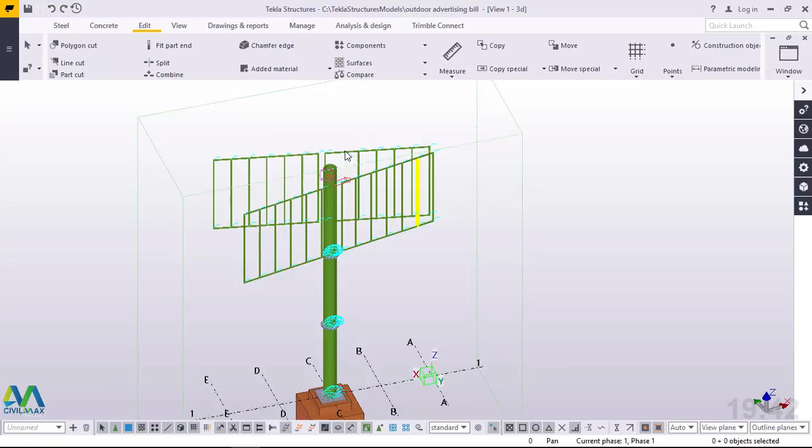I'll zoom closer. From here we have 4 panels, and we need another 4 to make them 8. The reason I separated them into 4 parts is for ease of erection or installation. Once all the parts have been fabricated, installing a whole 12 meters by 10 meters is hectic, so I decided to split them into 4 compartments or 4 steel frameworks.

But when erecting or replacing canvas for advertisement, it will take the whole span of 12 meters by 10 meters. You will not be able to advertise on one steel frame compartment and not the other. It won't be possible, because if you rent the whole 12 by 10 face of one side of the steel board, but if the advertiser is capable of paying for both sides, it's upon him.

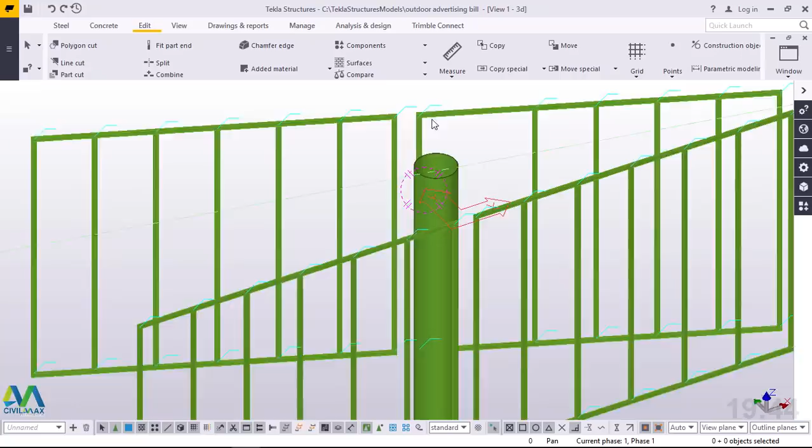Now let's get started here. The key is on how to reinforce this steel frame to the main column. That is the key part we are going to do today, how to reinforce this steel frame to the main or primary column. Now we'll go straight and get started.

If you take a look at this steel frame, we have so many steel members here. Center to center we placed a meter, but we can do with 2 meters, which is also okay.

Now what we'll do is get rid of some steel here. We'll press Control and delete all this. We'll delete that one, select this, right click and delete, then select this, right click and delete. Do the same thing on this side, click that, right click and delete, click on this, right click and delete.

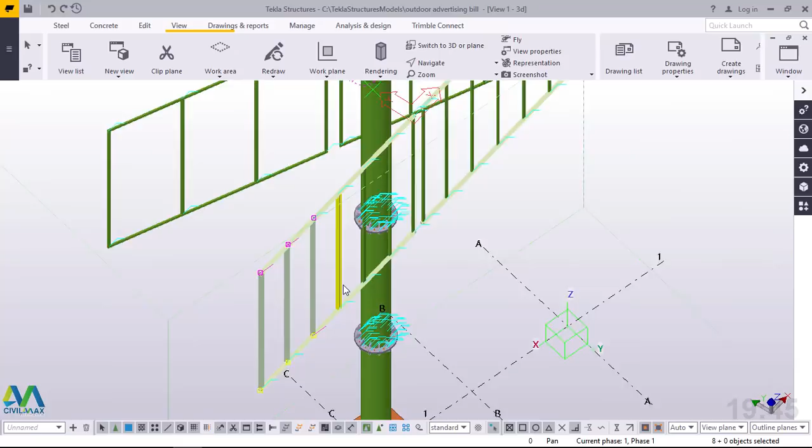On this side we will not bother a lot with it, because once we've done everything on this side, we'll just invoke a mirror command and everything will be mirrored on this side. So what we'll do is delete this end so we don't repeat whatever we've done several times.

Now let me just delete all this. To delete, just select with the left button on the mouse, then right click to bring up all these options where you can pick or invoke whichever command you want, either copy, move, or delete. We want to delete all those. Let me pick these by pressing Control just to be a little bit faster, then right click and come to delete.

We remove that. Now if I switch back to my grid 1 or elevation 1, I'll be able to see how this is presenting itself.

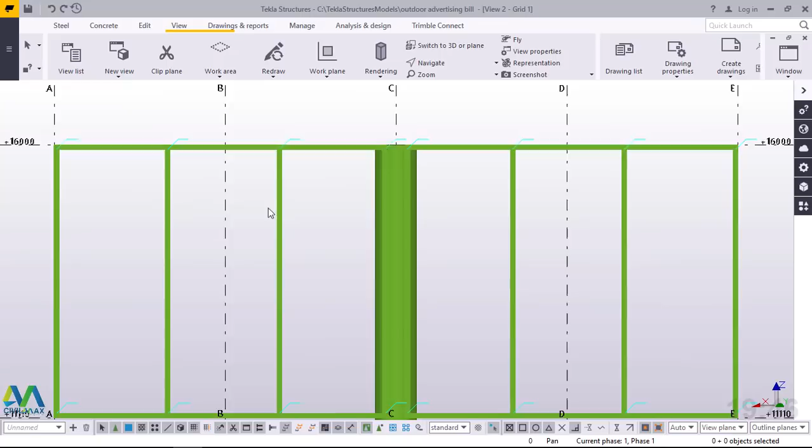Now from here we want to copy this whole compartment or framework to the level of 6 meters. Remember, this is a requirement that any billboard must have a 6 meter ground clearance. So we have provided that from 0 level to 6 meters. This is where the next advertising frame will end, at 6 meters, then it goes all the way to 16 meters.

Let me just counter check with you here. From here, if I click here and click there, up to here is 10 meters. Then from this end to this end is 12 meters. So instead of making one whole frame of 12 meters by 10 meters, which is easy to weld, it will give you an unresolvable problem while installing this panel at this height.

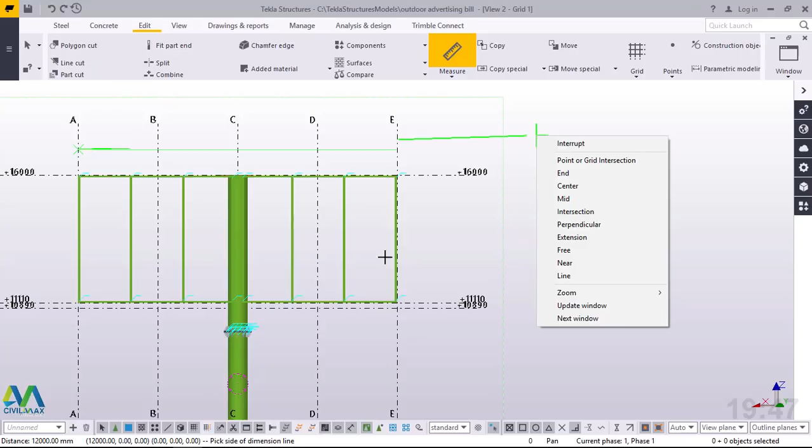Now the easiest way is to split it into 4 compartments, this framework and this one, so you will be able to mount them and bolt them easily, and installation will be fast and not hectic.

Now let's switch back to isometric view, and remember the key is how to reinforce this. We'll start here right away. We'll come to steel beam, we'll come to steel, and I'll snap on that spot at this end, and run all the way to the bottom end.

We want to use an L profile to provide an option where we can bolt this to a reinforced section, where we can bolt this to this primary column.

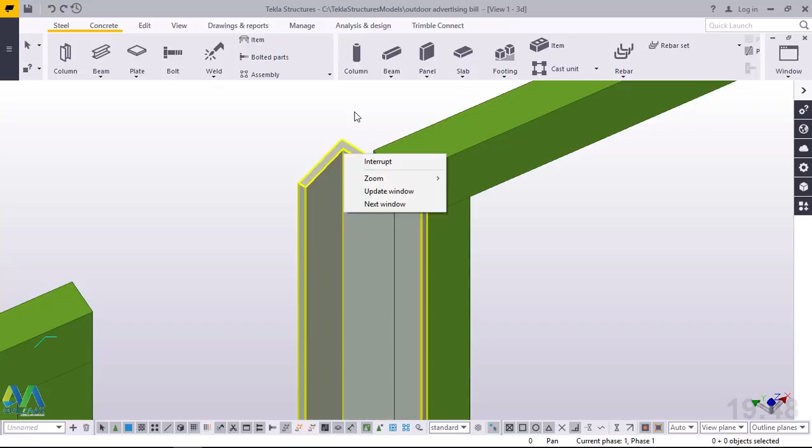This is not placing itself properly because our XYZ axis isn't properly placed. I'll click on it, right click, and come to delete to remove it. I'll come to view here, then reorient my XYZ axis. I'll click on the work plane tool and click on this. I want to place my axis right there.

Then I'll go back to steel here. I'll pick steel beam and pick beam there. Then pick on the point where I want to start placing my beam, the starting point, and I want it to end right at the bottom here. We will weld this angled profile against this framework.

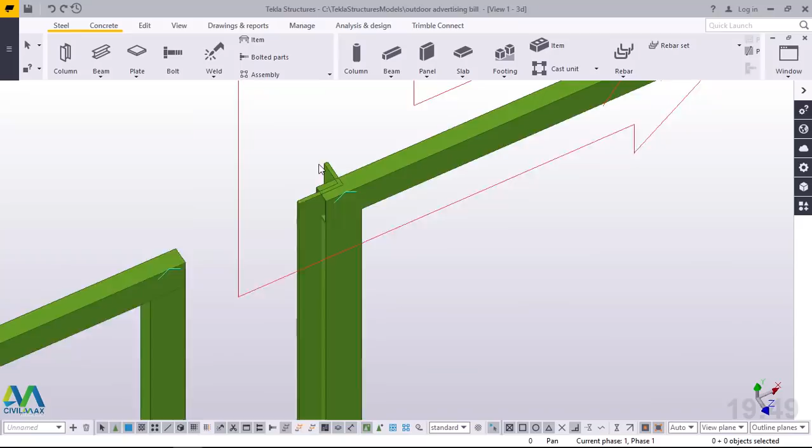We'll place it there, right there, then zoom out, come right here. Then once you've done that, we'll just click on it, then right click and come to move, pick on that corner, then place it here.

Remember, this will be welded to this member. Then what we are going to do, we want to do the same thing on this end. Now what we can do, just right click and come to copy special, then come to mirror.

We want to mirror this, but it won't mirror properly unless we reorient our XYZ axis. We'll come to view, work plane tool, then we place our XYZ plane right there. Then we come to, right click and come to special copy, then come to mirror.

Then we want to use an edge of this member as our mirror line from that spot and this spot, and snap there. The moment you see the angle is changing here to 180, just go ahead and click copy, right click and go to OK by giving it an OK.

Right click by selecting it, then pick move. We want to pick it from here, from that corner, and move it all the way to this end. We'll snap on that spot, right click and give it an OK.

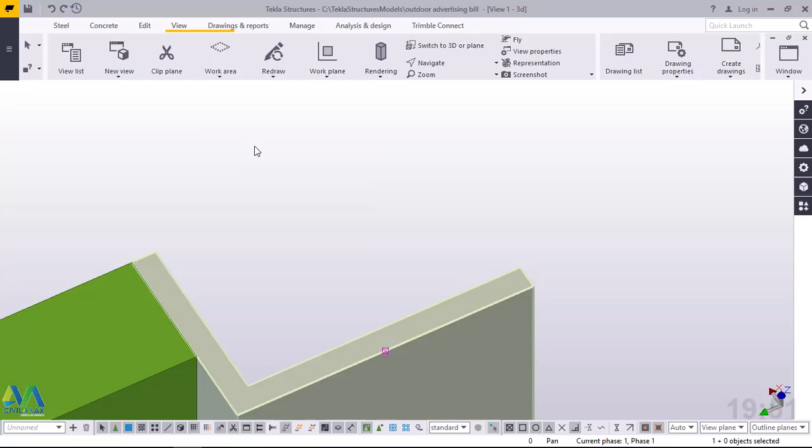Now we want to weld this to this. We'll come to applications and component here, just click here on applications and component. This dialog box will come up, and in this space just type weld.

A weld macro will be provided to you, a stanchion weld, numerically named 85. You can pick that, then we'll weld this to this. That will weld it to that. Let's wait and see. That has been welded but not welded properly.

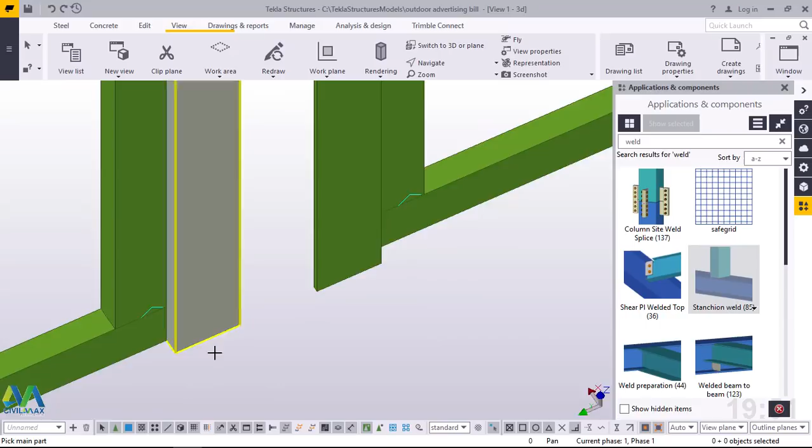Now we weld that to that, or you can weld this to this. Perfect. Let's check down there whether everything is right. Then we'll do the same thing here. We'll weld this to this. Perfect.

Now this has been welded to this, and this will be mounted onto a support from this main column, and will be bolted to these two compartments or framework. Now click on empty screen, right click and come to redraw to remove all those remains of weld or symbol, and active, to remove that active symbol of a macro.

Now if you turn this, you'll be able to see this has been welded to that compartment.

Now what we want to do, we want to copy everything, but before we do that, we want to place a steel member that will be running from the midpoint to that end. Let's do that by first locating the midpoint of this steel member, and let's check it first.

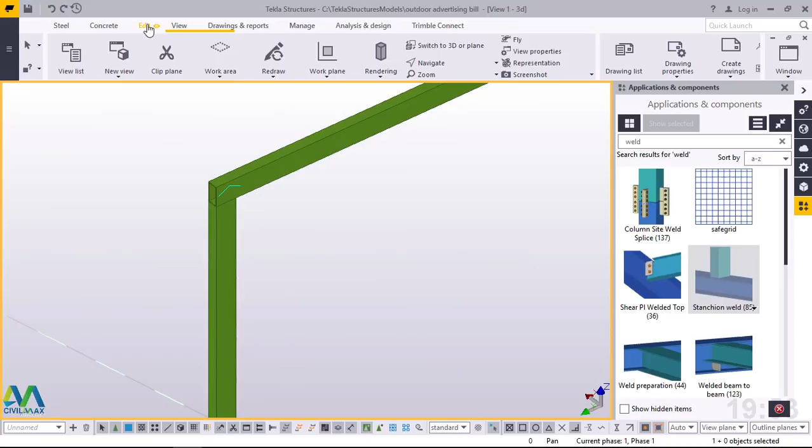Prior to doing that, we'll come to edit and come to points, and pick mid. We'll come to view. We want to rotate it to a point where we can be able to see all the points we intend to place our points.

I'll close that. I'll come to points again here. Pick that and snap on that spot, and I'll run all the way to this spot. I'll press Ctrl 2 and be able to locate this spot here.

Right there. The reason why I'm doing that, I want to locate the midpoint for this member. And to go back, remember you press Ctrl 4, will take you back to a solid 3D representation, not a transparent one.

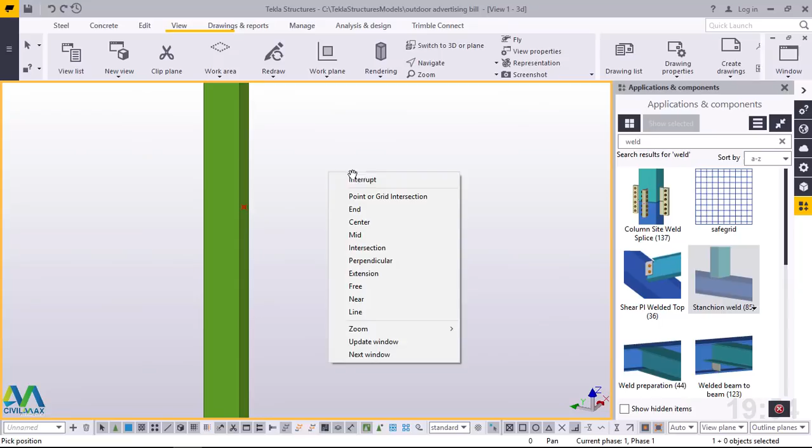Now to do this, I'll come to that. I'll pick the point, then right click, come to copy. I want to copy this point from this end. I want to copy it from this point. I want to copy it from this location, any point from that spot, and take it all the way to this end.

Take it all the way to that end. If you turn this closely or keenly, you'll be able to see that we've transferred that point to this end. Now it's very simple.

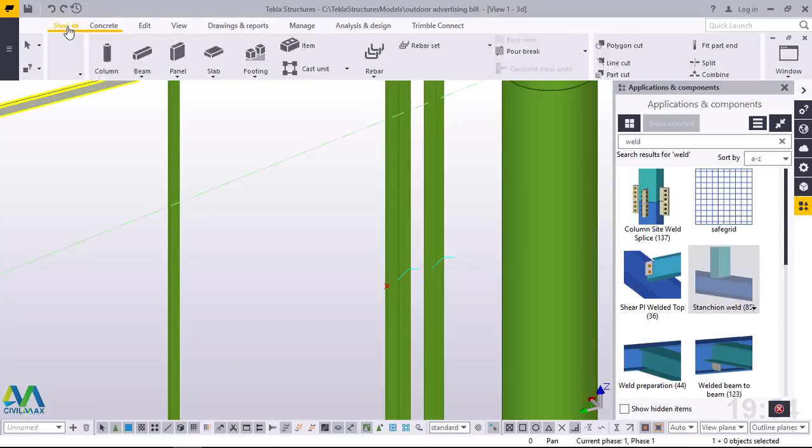Now come to the steel beam here, and just snap on this spot right there, zoom out and run all the way to this end. Snap it here, right there.

Now we want to change the size and profile of this steel member. We change it to RHS, rectangular hollow section. First, I want to rotate this, press Ctrl R, then pick a point where you want to rotate this member about.

Now I want to change the profile of this member. I'll double click, then the beam properties will come up because this is under beam. Then I'll come under general and click on that button under profile.

The catalog. Under this steel catalog provided to us, we'll work with the RHS, hollow section. I'll minimize that, then come to rectangular hollow section. I'll click on that plus sign to give a breakdown of various RHS profiles. Now I'll pick this.

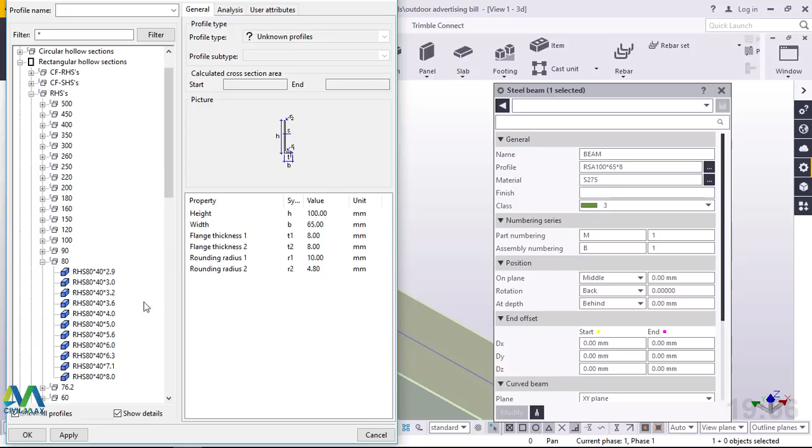I want to work with 80 by 40 by 3 millimeter thick. I'll pick on that, then apply and accept that. Once you give it an OK, come here under beam properties, then click modify. Remember, we are using Tekla Structures 2018, the latest version.

Now positioning, it is the right position, but the orientation is wrong. We'll come to position here and go to rotation. Under rotation, we'll play around with this until we get its appropriate position. We'll click either back, already there, or below, then try clicking apply.

But it has placed itself off the center. We want the center of this member to match the center where we placed the main, the center of this member.

I'll come back again, and under rotation, I'll click top and click modify. It hasn't moved properly. I'll click top again and click, it has not responded. I'll click below and click that, it has not responded. What we'll do again, click front and click that. It went back where it was before. So these are the options you play around with until it gets into the right position.

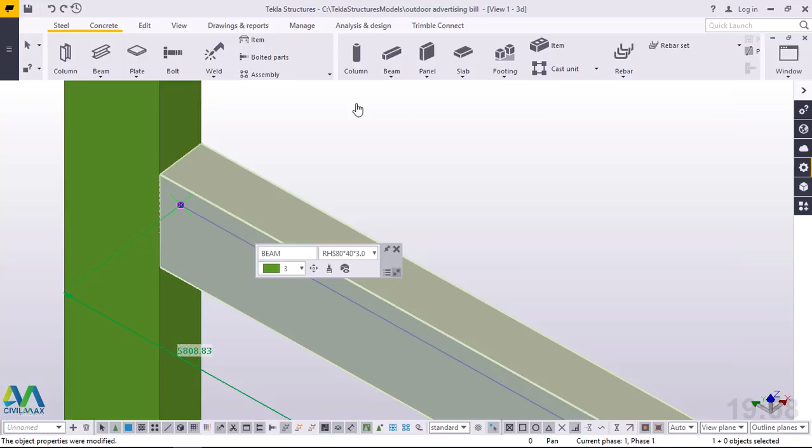Now after doing that, we'll switch back to Control R and pick a position where we intend to rotate this model about. Then zoom out, check whether what we've done is right. Perfect.

Now the same thing will be done to this framework at this end, and to do that is simple. Just right click and come to copy. Under copy, we want to pick this appropriately, from this spot, and run all the way to this end.

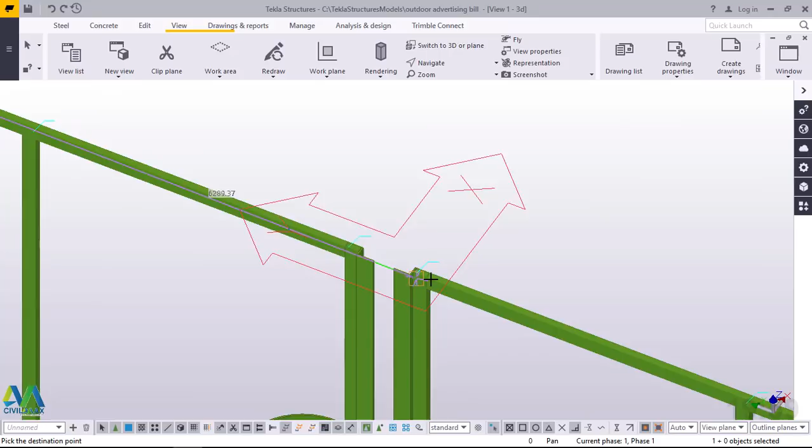We must be very accurate with this. Perfect, that has been copied. Now the next is welding.

We want to weld this to this. Let's try that if it will work for us. Then we want to weld that to that. Then again we want to weld this to this. We come to navigate and rotate with mouse, then rotate about that spot so we can see this spot, and we want to weld this to this.

Perfect. Right click and redraw to remove all those remains of active commands for the macros we've used for welding. Now this is what we have for now, and remember we'll place some bracings here later on after we've reinforced our billboard properly. I'll close this.

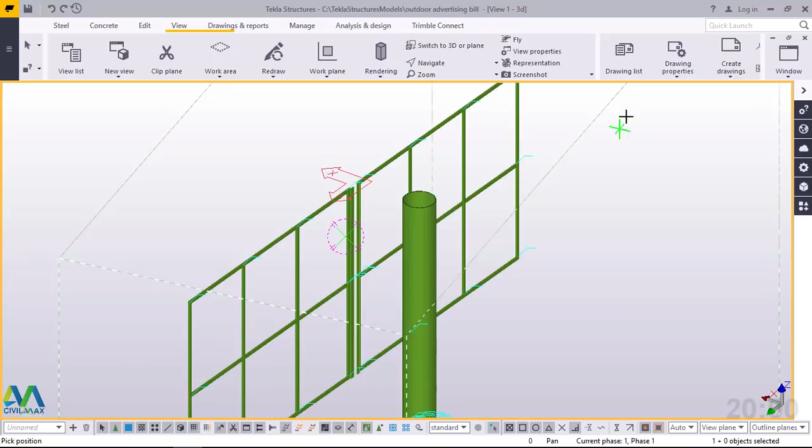Once I've closed that, I'll select everything here, as simple as that. Press Control and pick on that, pick on that, pick on this. I'll switch back to my plan at 16 meters, I'll go there later on. I'll switch back to grid 1 or elevation 1.

I'll pick on that. Now our main aim is to copy this member to this height of 6 meters, which is the ground clearance.

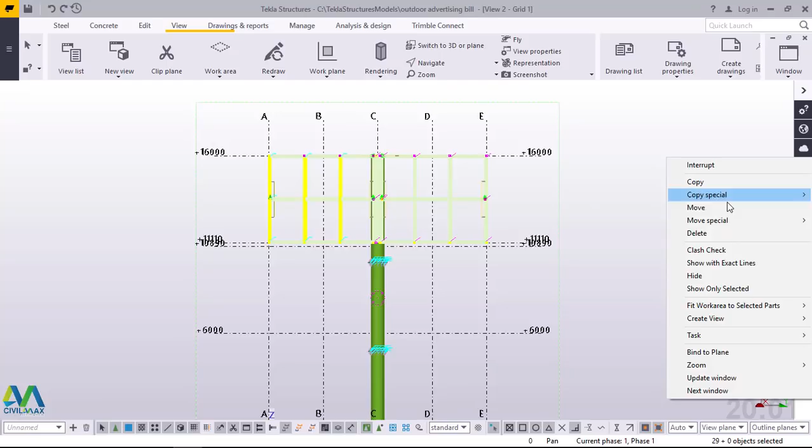I'll right click and come to copy here, then pick it at a position that will be very accurate for us. I'll snap on that spot, then zoom out and locate a point here for level 6, for 6 meters above the ground level. Then having done that, I'll press Control again and select everything here.

Pick on that, pick on that, pick on that, pick on that.

I'll switch to isometric view. I'm not able to see the other parts. I'll pick on that, I'll pick on this, I'll just select that. So once everything has been selected, make sure you don't copy the grid. Grid should not be copied.

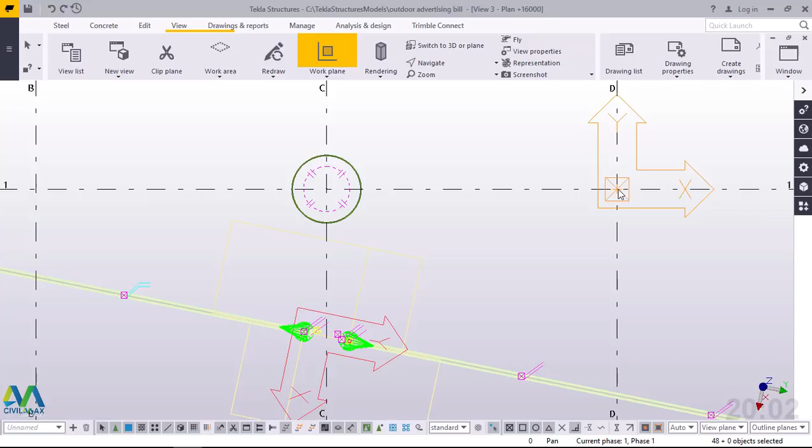Now we'll switch back to this height of 16 meters. We want to mirror this, and prior to doing that, make sure your XYZ axis is in appropriate position. We'll come to view, and over here we come to our work plane tool. Then we'll shift and place our work plane tool down here. Click there, right click and interrupt just to exit from that work plane tool command.

Then still this selection is still active. We'll right click and come to special copy. Under special copy, we'll come to mirror. Then we'll pick this point and this point as our mirror line. Then snap right there, then invoke a copy command.

Right there, let's wait for the result. It has been done. Click expand, then come here and click OK. Then switch back to isometric view for you to see what you've done, whether it is accurate or needs some slight rework. It's perfect. Click, right click and redraw to remove those remains of the copy command.

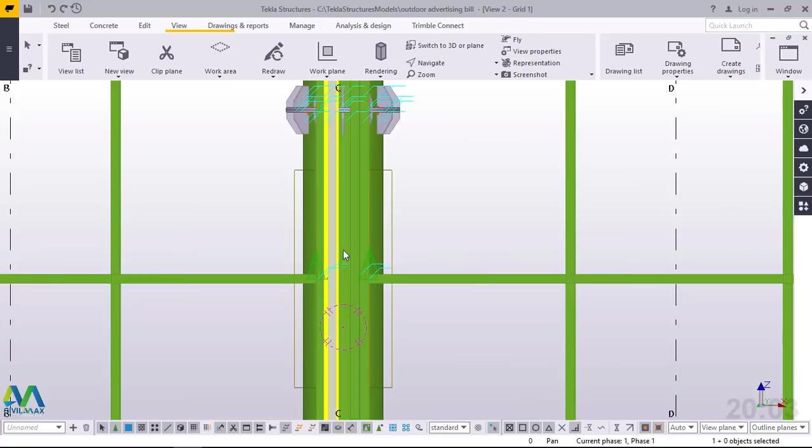Now this is what we have now. If you switch back to elevation 1 or grid 1, this is what you'll be able to see. Let's refresh again, let's redraw. This is what you'll be able to see from 0 level to 6 meter high.

This is the ground clearance. That is the standard required for a billboard to be off the ground, 6 meters.

Now this reinforcement we will place later on. Let's still work on the reinforcement of the steel frame. Let's switch back to isometric view, and we want to place our cap plate.

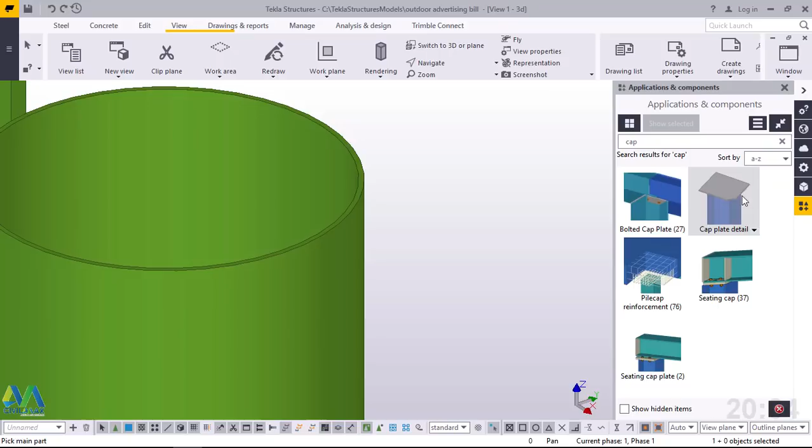To place that, we'll just come under applications and components, this button here, and we'll just press cap. Then this cap plate, cap plate detail macro, will come. Then the moment you invoke that command, select the column you want to place the cap plate on, pick on it, then pick on the position you want to place it on, the center. It will appear on that spot.

There it is. Now we'll close this. We'll double click on that cap plate, because we don't want a square cap plate. We need a circular cap plate because our column is cylindrical. We'll close this. I'll zoom out and place this in a position where I'll be able to see clearly.

Now from under this cap plate detail dialog box, I'll come under picture and go straight to that drop down arrow. I'll be presented with 3 options. Do I need the rectangular or circular? I mean, there are 2 options: rectangular square, and circular. I'll pick circular because my column is circular or cylindrical.

I'll come here and click modify, and prior to doing that, I want to change the thickness of my plate. I want 16 millimeter, that's all. I don't need this dimension because a circular measurement is just one, either radius or diameter. I'll pick that, click modify, and click OK.

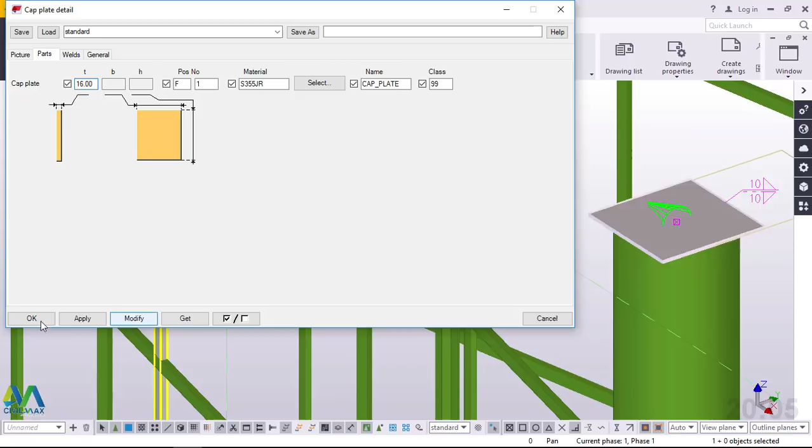Right click and interrupt just to exit from that command. And we want to remove this symbol. Remember, this green symbol means the connection is perfect, and shows the macro is active. To remove that sign of active command or active macro, just left click on empty screen, then right click, then come to redraw. You will refresh your screen, and those signs will disappear.

Then we'll rotate this by going to navigate and pick and rotate with mouse, then press your left button on the mouse, and you'll be able to rotate this comfortably. We've done that. Let's switch back to a plan of 16 meter high. We'll refresh this. Again, we will refresh that.

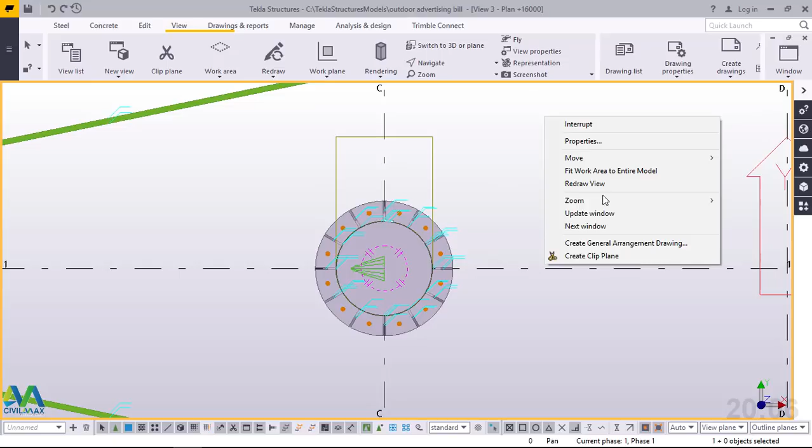We want to start reinforcing our steel, our steel frame. And remember, also in the midpoint here, we want to place an angled profile. Now what we'll do prior to placing this reinforcement or supporting members to our canvas steel framework, we'll switch back to isometric again.

We'll switch back to our isometric. Then we'll reorient our XYZ axis. We'll place it here, we'll place it here, somewhere here. Place it there. We'll place it there.

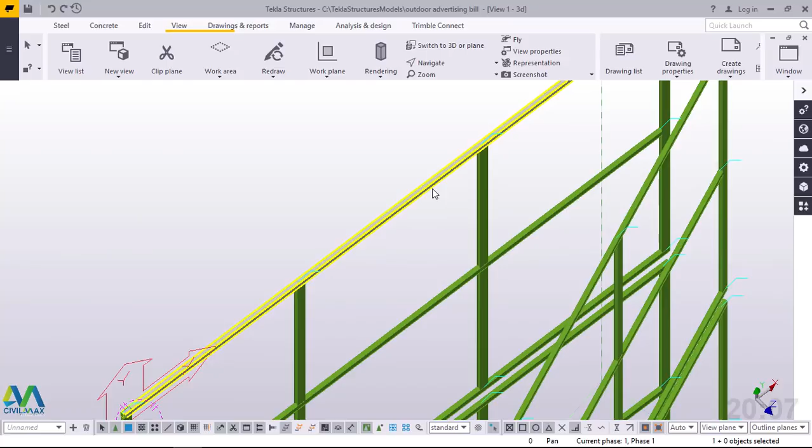From there, we want to place this at the midpoint of this framework. It is simple. We'll come to midpoint here, pick online, then we want to locate a midpoint from this end, that end, to this end, right there, and close that. Our midpoint is there.

And what we'll do, we'll just copy one of these. We will not copy that. We'll come straight to steel here and come to steel beam and pick on that. We will copy because we don't want to have a repetition of what we've done several times. We'll pick on this, we'll pick on that. Then come and copy it here.

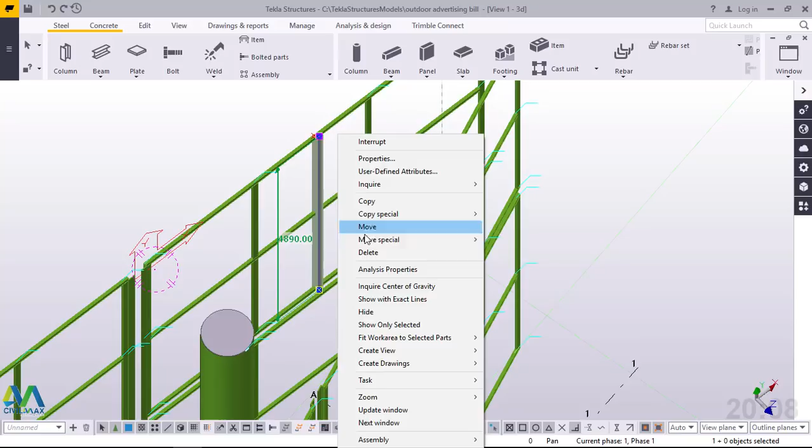Come and copy it there. We'll right click. It hasn't gone deep because it has a welding that is clashing with some of our steel profile. We'll come here, right click, come there and check. We want to check this measurement, interrupt that.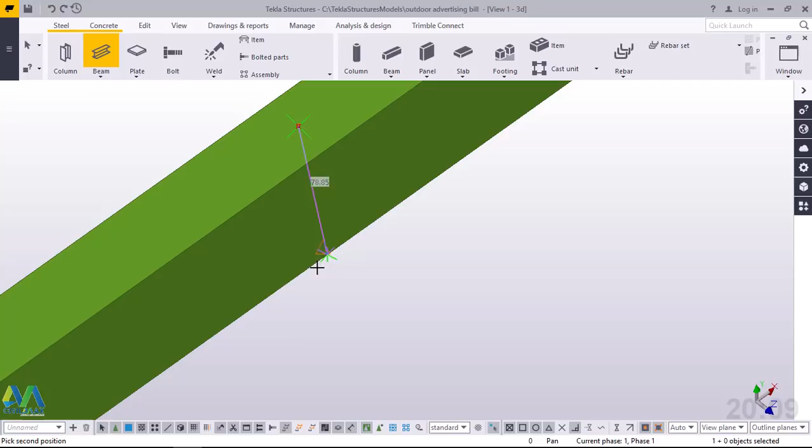We want to check on this measurement. Let's click on that. You'll be able to see this is 4890. We'll come to steel beam right there and snap right here and locate it down here and type 4890 and enter on the keyboard.

That is not right, the position is not right. We'll undo that, click on that and delete. We'll come to edit, come to edit points. We'll come to any position and snap on that spot, and snap on this spot, then snap down here. Try rotate this to see whether your points are located in appropriate position.

This is accurate and we can just place that member right there. We'll come to steel beam, from that spot to this spot, 4890. Then enter on the keyboard. Then we'll change this member to an L profile.

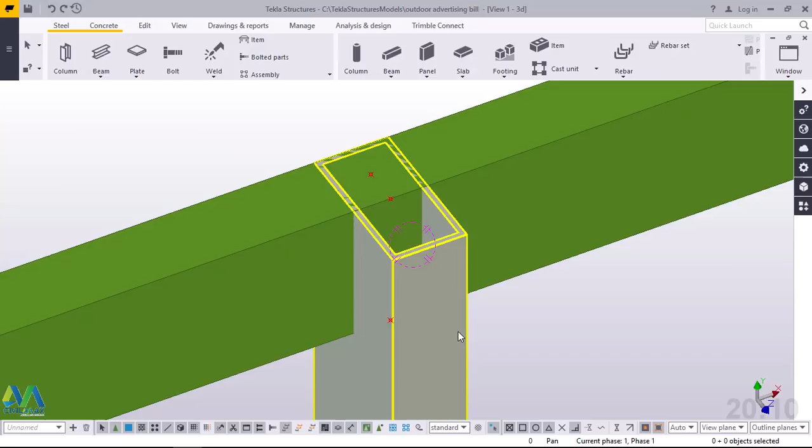Under beam properties, after double clicking on this member, click on that button under beam properties. You will be presented with a steel catalog where you will be able to select the appropriate steel profile and size. Now we'll come to L profile or L profiles.

Under L profiles, we'll come to RSA. RSA will go to 100 by 65 by 8 millimeter thick. I'll go ahead and apply and give it an OK. After doing that, come here and modify under beam properties, just like that. Now here we'll play around with it by rotating it to a position where we will be able to link it with the main supporting member.

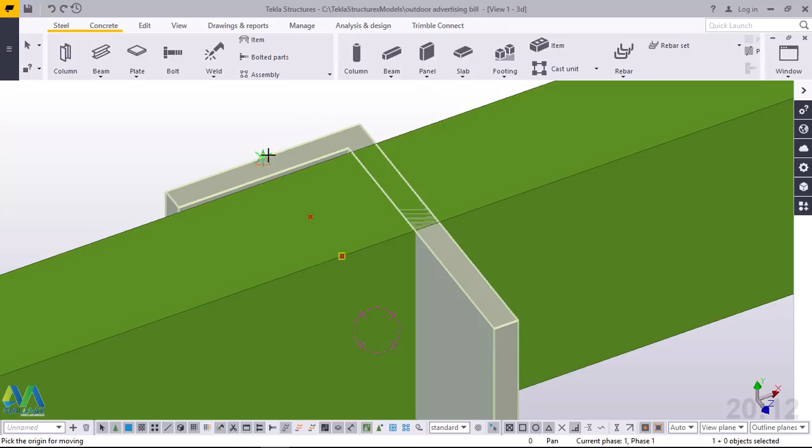Here we want to weld it against this member, running all the way to the bottom end. It is simple: what we'll do, we'll right click and come to move, pick it from this spot and bring it here. Perfect.

Or from here we can just double click on it and reorient it under rotation. Here we'll come to rotation and click back and change that. It won't be the best way to present that. Just click undo, we want that to be welded on that spot. Perfect.

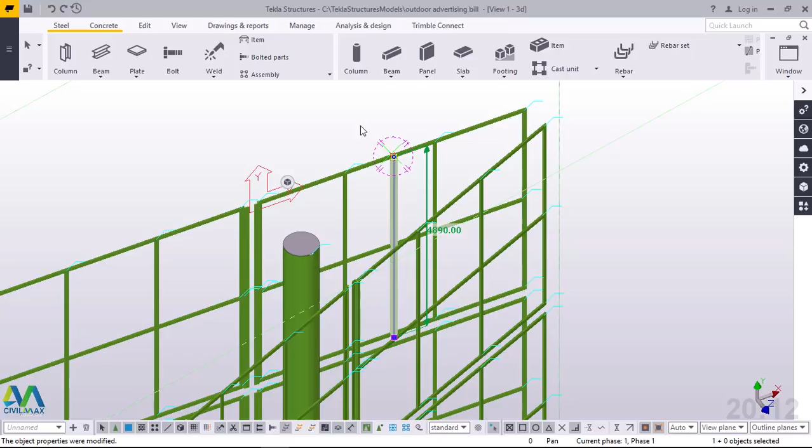We want to copy the same thing on this end. Just right click and come to copy. We want to copy it from this spot, from that spot, and bring it all the way to this end, all the way to that end. Right click and click interrupt.

It has been copied, and we want to do the same thing. Just press Ctrl and pick that, pick copy, and we can copy it from this spot, from that spot, going down here. Place it here. Just zoom closer, and you can place it there. Right click and interrupt. Here they are, or here it is.

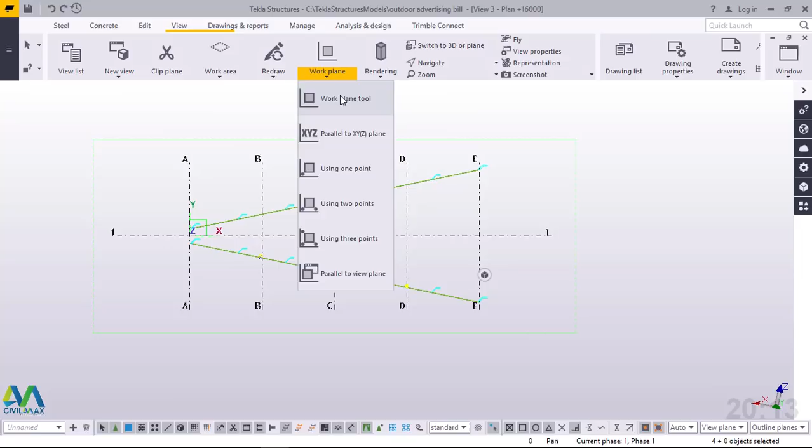Now we want to mirror this on this end. Make sure you select that and that. Then we switch back to our isometric, our plan view at 16 meters, and click on that. Key step is to change the orientation of our XYZ axis. We'll place it there, right click and come to interrupt. Then right click and come to special copy and click mirror.

We want to use this spot and this spot as our mirror line. Click on that, then come to copy and give it an OK. Click expand and give it an OK right there. Now we can switch back to our isometric view just to check on what we've done.

Come to navigate, rotate with mouse, and check that. It has been copied here, down here. It has been copied here. And remember, this has to be welded, all of them must be welded. That will be done later on. The key part is we want to reinforce this to our primary column.

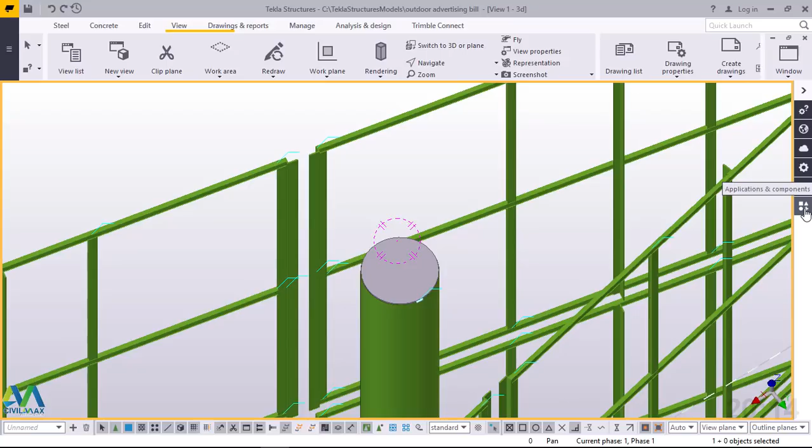Now we'll go back to window. We'll switch back to a plan at 16 meters high. Then we'll come to steel, we'll come to steel beam. We want to start placing our member from that spot, going that way to that end. We can place it there. We can place it there.

And also we can come here and snap right at the middle there and place it here. Perfect. Now this will be mirrored at the other end, and this one will be mirrored at the other end.

Now let me switch back to isometric view right there, then we see how we will work on this. Click on view, navigate, and turn this around like that. Now if you take a look, they have been placed properly, but the steel profile is not appropriate, or is not the best choice for reinforcing all these panels.

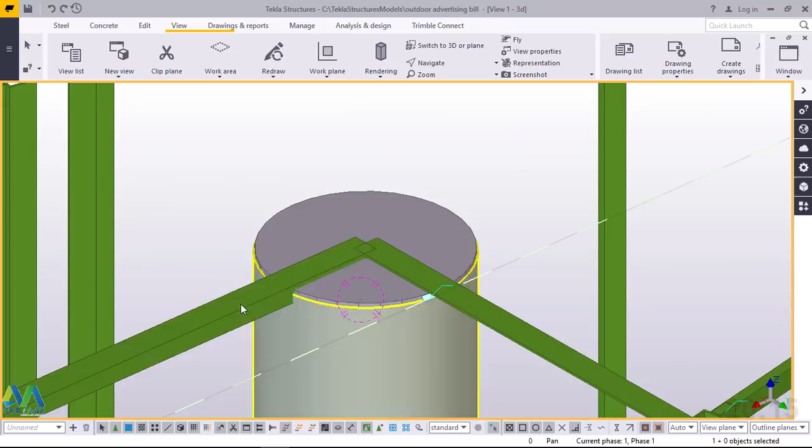Steel frame. We'll change this by double clicking, and after double clicking on this beam, properties will present itself, or will appear on the screen.

From here you'll go straight to general. Under general, come to this button under profile, then click on that. You'll be presented with the steel catalog dialog box.

Now from this steel catalog, we want to change this to universal beam. We'll minimize this, then go to I beams or I profiles. Just scroll up, then we'll click this plus sign under I profiles. Now under I profiles, we have several steel sections: we have HAU, jumbo sections, RSJ, and universal beam. The universal beam is what we intend to use.

We'll click that plus sign, then go all the way down and pick 305. Make sure that the steel profile or steel members you're using are available, available in the local hardware stores or steel retailers or wholesalers. Now I'll pick on this.

I'll pick on that and apply it and give it an OK. Then pick on modify. It has placed itself, but the orientation is wrong.

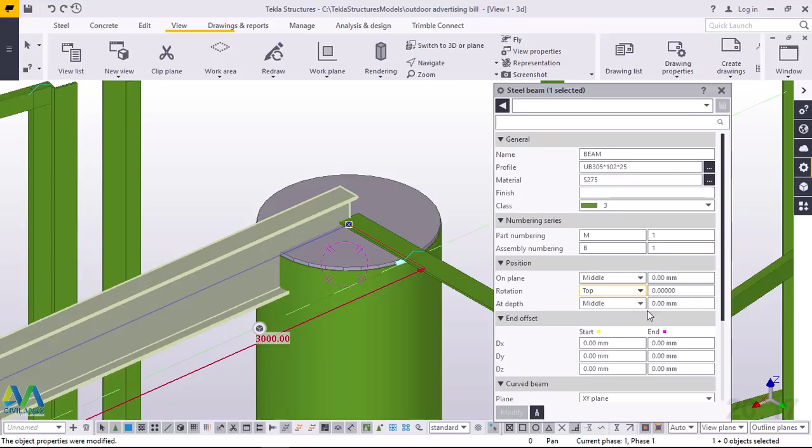I'll come here again under rotation. Now I'll come to depth here and click behind, and see how it is positioning itself. I'll do the same thing here, double click on this and change this.

Double click on that, then come under beam properties here, or steel beam, then click on that under profile. Then under profile, this steel catalog will come up. From here you'll be able to select whichever steel member you want, as long as it matches the standards required for a particular structure.

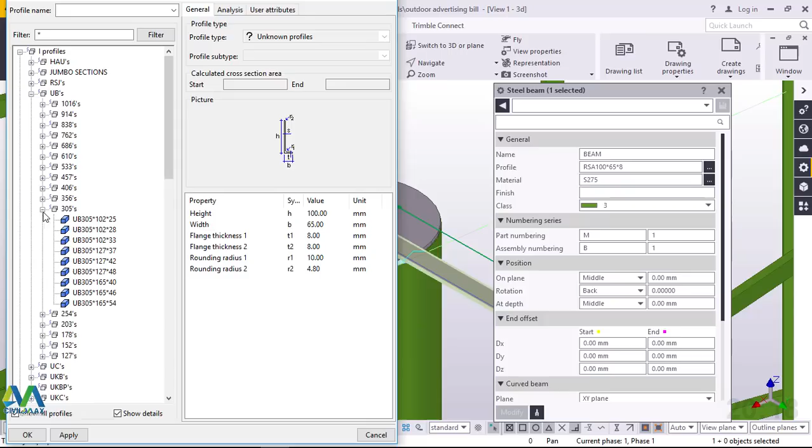Now I'll minimize this and go to I profiles, because that is what I want to use. Now I'll come to a universal beam, UB's, and pick that size 305, then pick the first one. The moment you click that, apply here and give it an OK by pressing OK.

Then come here, modify, then do the same thing, reorient the position of this member. Come under position and give it below. Right there, it has positioned itself appropriately, but that's not the end of it. Come to depth, then come to behind, then click on OK.

Perfect. Now from here, we want to offset these two members by 200 millimeters. We'll right click, then check our XYZ axis, the Z axis pointing upward. Now, we want it pointing upward, but these steel members need to move down, so our measurement will be prefixed with a negative sign.

Now I'll come to copy special, and under copy special I'll come to linear. The moment you click linear, this copy linear properties will come up. Then we have three axes here: X, Y, Z, and we want to use the Z axis.

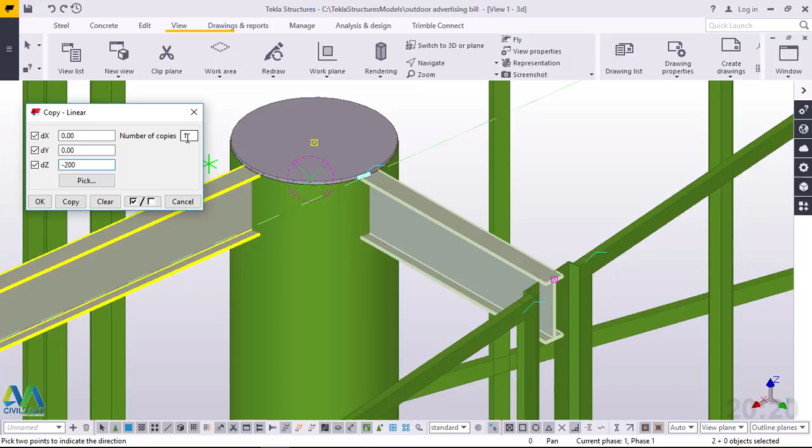Where do we want to move? We want to move down, but the Z axis is pointing up, so we have to prefix this 200 with a negative sign. How many do we want? We want 1 to be copied. We'll go ahead and click copy.

And click that. Right click, and if you don't need this, we could have even used a move special command. Now what we'll do, just right click and come here and delete this. Perfect. Remember all the time to save your work.

It's very paramount. Now come to navigate, come to rotation, or rotate with mouse, then pick a position where you want to rotate this model about. I want to pick this position. I'll pick that, then press my left button on the mouse and hold. I'll be able to turn this comfortably. There we are now.

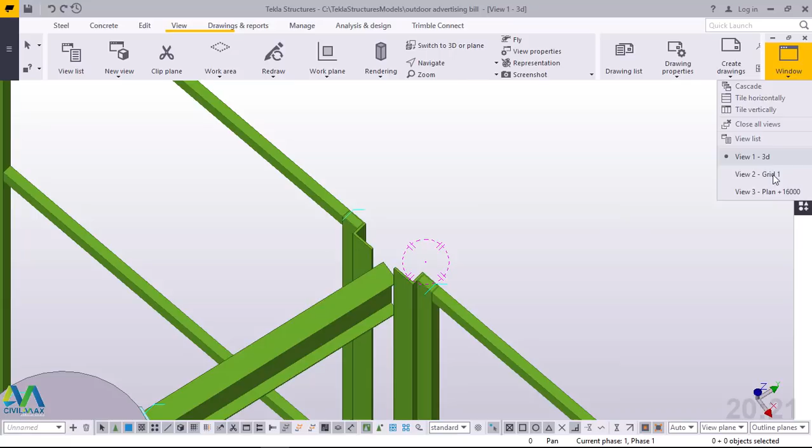As simple as that. Now let's start reinforcing this. I'll switch back to my plan at 16 meters, and I want to trim off this. To trim this is very simple. Come to edit. Under edit, we want to locate some points here that will help us trim off those parts.

I'll come to any position here and snap on that spot, and come all the way and snap here. Once I've done that, I'll come under edit and invoke these commands. I want to cut by line. I'll pick on that, then pick, just read down here, select the object to be cut.

I want to cut this, using this line from there to this end, and I want to pick the side to remove. I want to remove that side. That has been removed for us.

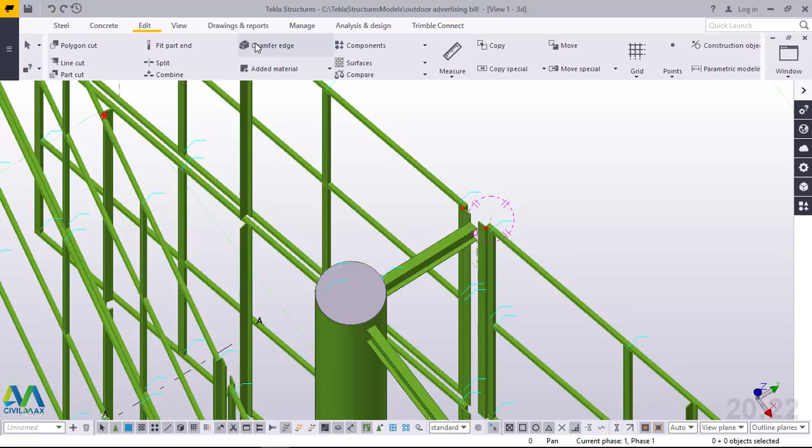Perfectly removed. Now I'll come back to isometric view. There is an extension of this member protruding inside this CHS, and we don't want to use that extension. We want to trim it off.

We'll come to view and rotate this to a position where we'll be able to see the exact length of protrusion into our main column. I'll press Ctrl 2, and if you place your cursor, you'll be able to see the extension of the protrusion of this part.

It's simple, just click on it. You can either click on this end and drag it, making sure you are accurate, and just place it outside there if you could be that accurate. Or you can just double click on it.

You can click on it, then click on that measurement. Then we want to adjust it. We want to chop off 500 millimeters out of it and enter, but it's adjusting in the opposite direction. We'll undo that and use the click and drag option instead.

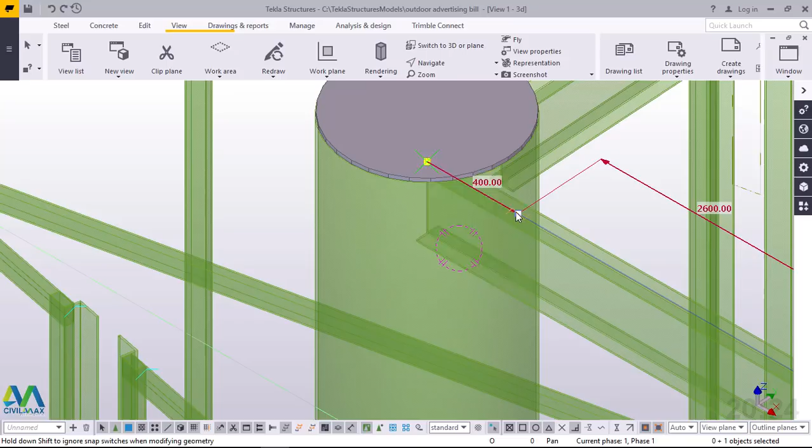Perfect. Now come to rotate this using the mouse. That's gone beyond what we expected it to do. You can try adjusting this measurement to change it to our requirement, but it's moving in the opposite direction. Try that again and click on that.

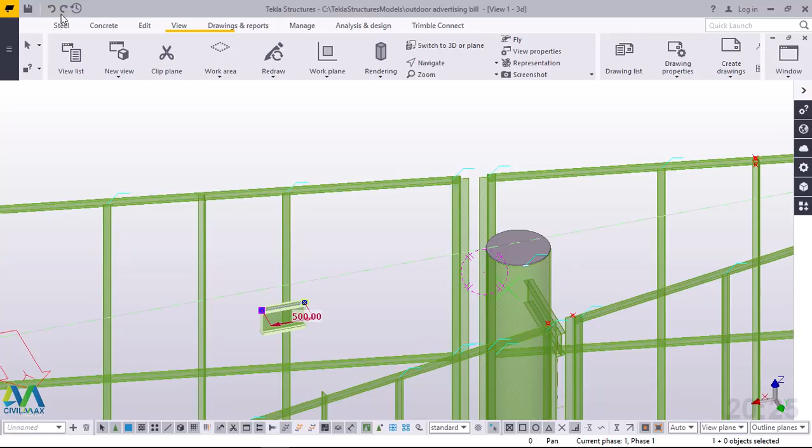Select this member and type 500 and enter. It has moved. Click on it again and click on that direction, then type 2500 or 2800 and enter on the screen.

Then click on it again and click on that direction, select that, click and type 2600 or 2700 and enter on our keyboard. Turn this around and see whether what you've done is right.

Come to navigate here and rotate about that spot. It's still a small protrusion, but that can be neglected. We'll just weld it, then press Ctrl 4 and come back to our previous isometric view presentation. Remember to save what you've done.

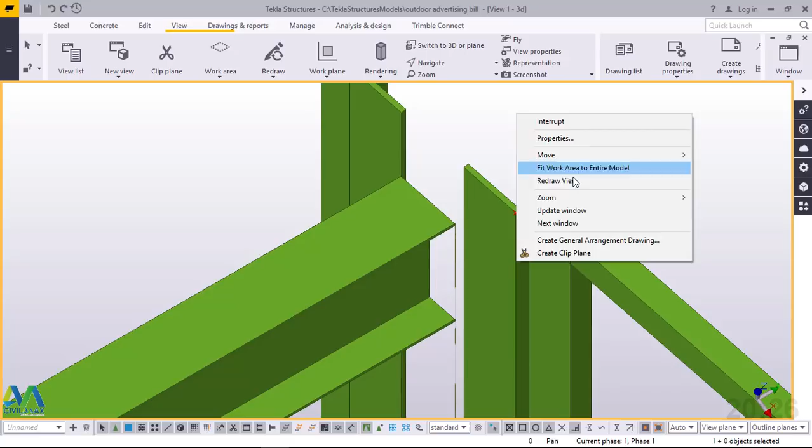Now from here we want to place an end plate. Let me first redraw to remove all this. Placing an end plate is quite simple, but first we need to align our XYZ axis with the way we've chopped off or trimmed this part.

We'll come to view, come to workplane tool, and place our workplane tool right there, then right click and click interrupt. Then come to steel, pick steel member or plate. We'll pick plate.

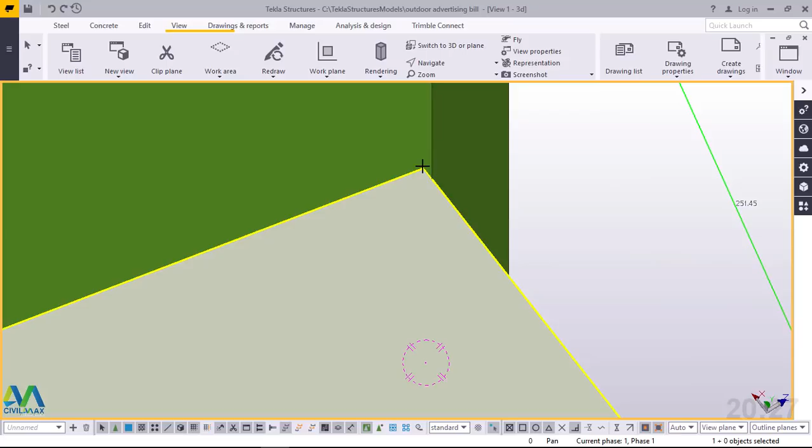Make sure you are seeing what you are doing clearly. Pick a plate, right click, snap on that end, rotate that, right click and snap on this end, come here, rotate this and rotate that and snap down here. Snap down here and come back to your initial spot.

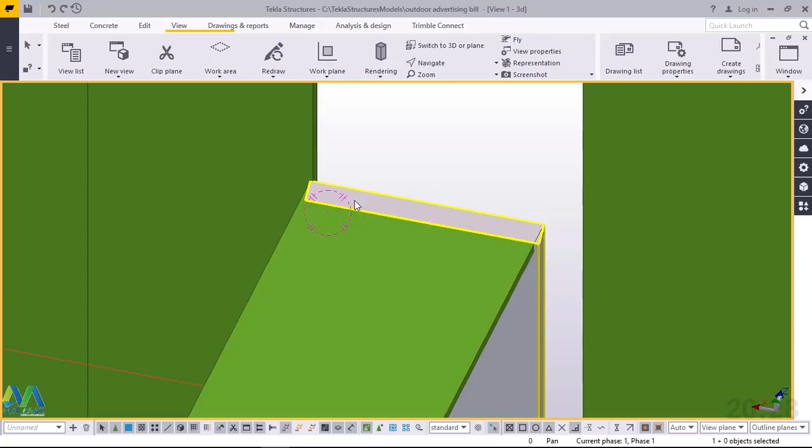Perfect, a plate has been created, but it is not in the right position. We'll double click on this just to make some adjustments. We want to change the measurements of this plate, but the approach we've given it won't make it work for us.

It will be very difficult for us to make an end plate that will connect to these two L-shaped or L-profiled steel members. We'll cancel this, select that member, right click and delete. We'll delete this plate. Instead, we want to use another steel member and convert this to a plate. To do that is simple.

We'll come to steel, pick beam right there, then snap right here, run all the way down here, right there.

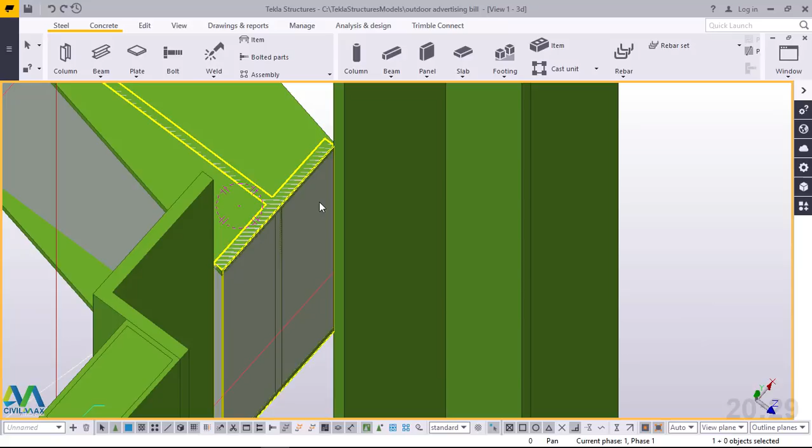Once you've done that, we want to change these to plates. We'll double click on that, then these steel properties will come up. Under profile, we'll click on that.

This will take us to the steel catalog. We'll go straight to steel profiles, then plate profiles. Down here we have plate profiles. We'll pick on that, then go straight to plate. Go to plate PLT and click on that.

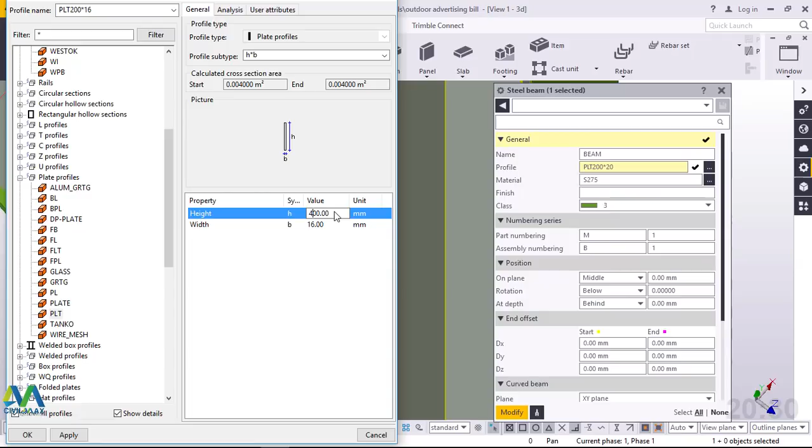Once you've clicked on that, we want to change our dimensions from this end. We want a thickness of 16 millimeter, and we want 400, which we will adjust later on. Apply and accept.

Apply and accept, and come here and click modify. You've seen our plate has been placed and the orientation is totally wrong. Now we'll come to position here, come to rotation and give it a back position, then click on that. It has positioned itself, but the width is wide.

That one is rectifiable. We'll come here and change that to 300 and click modify.

Close that. Now come to view, come to navigate, click on that and rotate that to this position so that you'll be able to see it clearly.

Click on that, change this to 200, change that to 200, and that's okay. That's okay, the way it is, it's okay.

From there, we'll just close this, click on empty screen, then come to navigate. We want to rotate this and see whether it's well placed and aligning itself with these

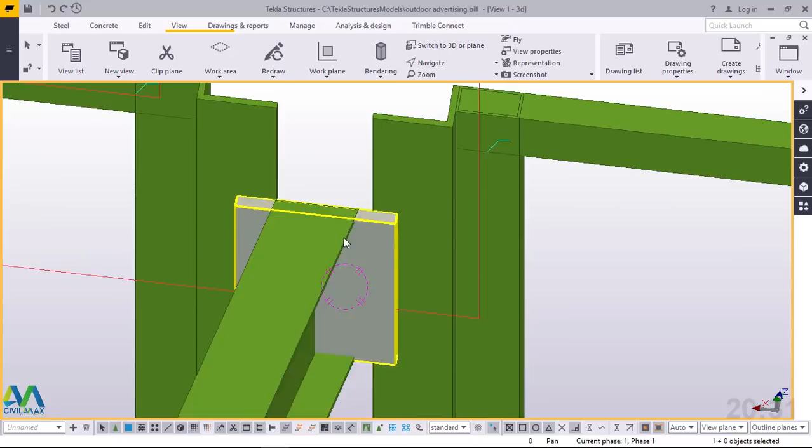two L-shaped steel profiles. Now we want to weld this plate to this member. We'll come to applications and components, then under applications and components we'll just type weld. Under weld we'll pick stanchion weld. We want to weld this to this. Perfect, it has been welded properly.

Now come to navigate, rotate with the mouse, rotate about that spot and turn this round like that. Perfect. Now this plate has been welded to this beam, and this beam is attached to the primary beam, the primary column. Now we want to bolt this.

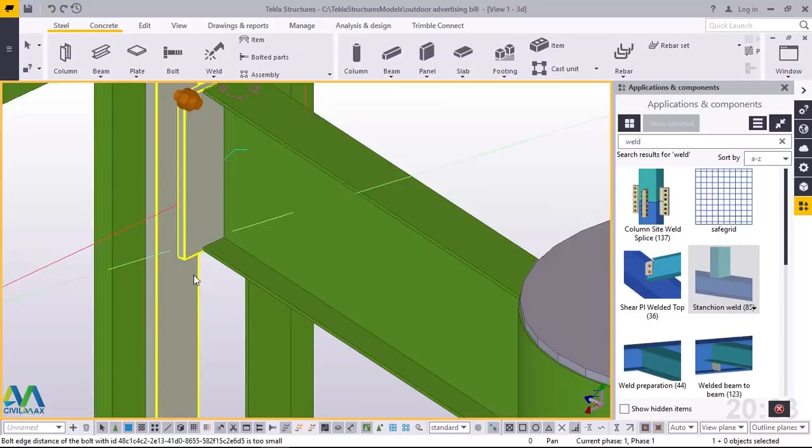We'll come to steel, we'll come to bolt, we'll pick this member and this member, press space bar, then we want to snap on that spot, then snap on this spot, just on a straight line. As long as it is on a straight line, right click and interrupt. We have our bolt there.

Now we want to play around with this bolt to place itself in the appropriate position. Just double click on that bolt. Once you've double clicked on that bolt, you will be presented with the dialog box of bolt, where you'll be able to change the position and the size of the bolt. Here it is, the bolt.

Now first of all, we want a washer here on the bolt. Now we don't want to use M20, we want M16, that is okay for us. M16. Now we'll come down here and first of all check the axis. It is the Z axis.

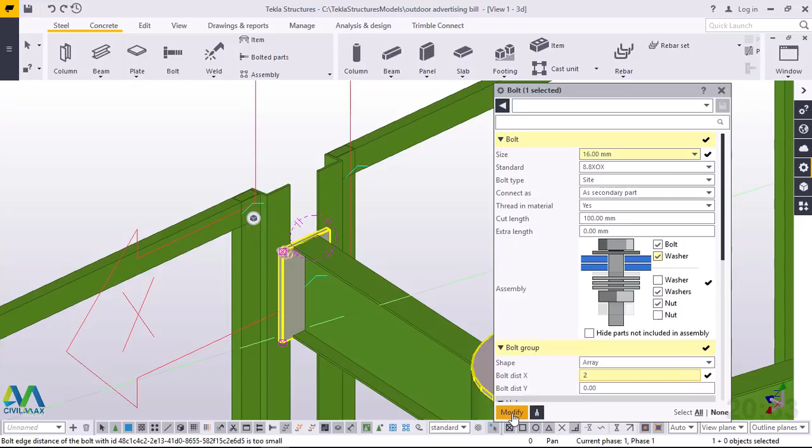We want to offset this. We want how many? We want 2 of these. Click modify. Click modify. Zoom up. Note 2, we want maybe an offset of 100.

An offset of 100, and how many do we need? 3, at 100. We can change that to 75 and click OK, modify. Still, we are still on that spot.

I'll scroll down under this dialog box and come to this position. Now under X, I want an offset of 50 or 30 millimeter. I want an offset of that.

Now again, I want an offset of 20 again. I'll click that. 50 will be okay, 50 will work best. That will work good, the best for us.

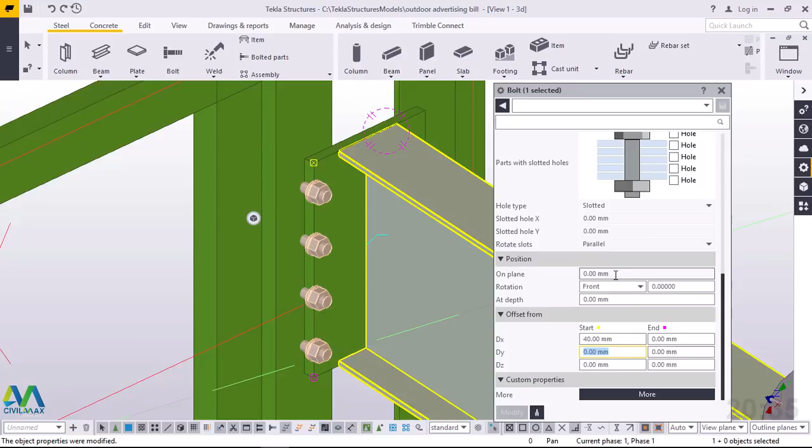Then we'll come back again under that, then under Y axis. Under Y axis or plane, we'll feed here. On plane, 20 or 30. On plane here, negative 30.

We'll see that just changed. Negative 30 or 35. Perfect, we'll close this. Once we've done that, we'll switch back to view, navigate and rotate this.

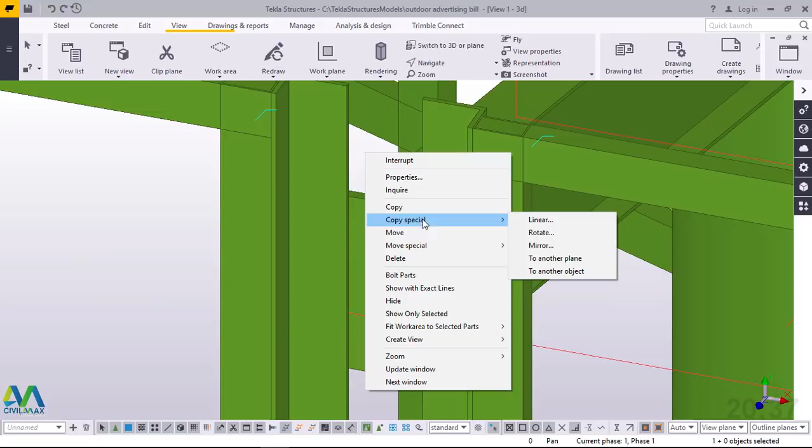We'll come here, right click and come to special copy, mirror. Then we want to mirror it from this spot, from that spot to this spot, and click copy. It has not copied itself properly because our mirror command has not done that properly.

We'll just do a manual bolting here once again. We'll come to steel, we'll come to bolt, click that and that, then press space, snap on that spot, run all the way and snap on that spot. Right click on that,

and remove this, make that 0 and click on that. Once you've done that, come to 40 here and try to adjust this to 50. Not right.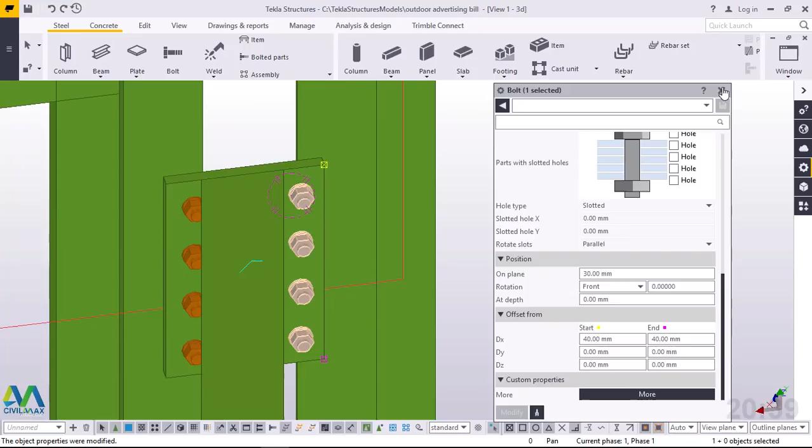Come here and change this to 30. Perfect. Close this, come to view, rotate this and see whether what we've done is right, but our plate is small.

What we'll do, we'll double click on this plate. After double clicking on the plate, we come here and add this, make this to 250. We'll change that to 250.

After changing that to 250, we'll double click on this. We'll double click on the bolt here, and after double clicking on the bolt, we'll scroll down and change this to 20. Again, we'll change it to 10, make it 10.

Do the same thing here, double click on that, come here and change this to 10. Perfect. This is now much better. Right click and redraw. Come to navigate and rotate this.

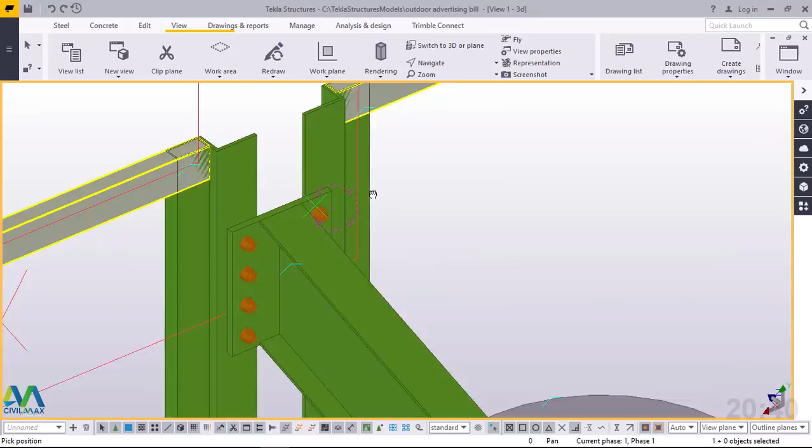Come to weld. Remember this has to be welded on that. This and that we welded.

Now I'll come to navigate, come here, and I want to weld this to that. This member to the main column. Now under applications and components, I'll type round tube.

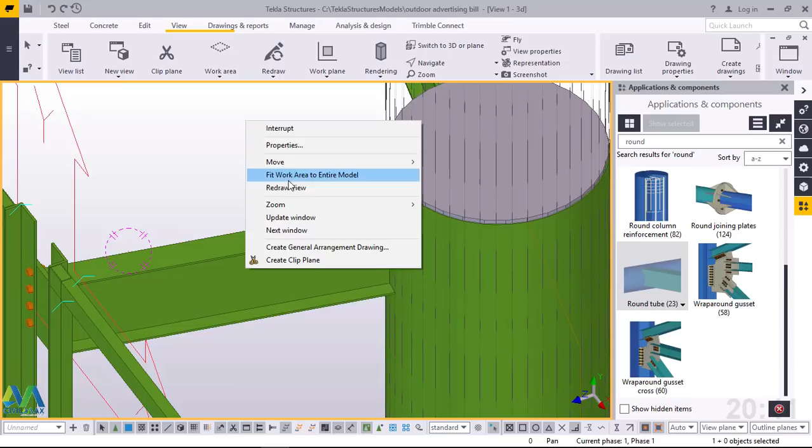Now on a round tube, I'll pick on this and I want to weld that to that. Perfect, it has been welded. I'll right click and redraw that. Once that has been done,

I'll change the orientation of my XYZ axis to the default one. I'll come to view, come to work plane tool, I'll just place it down here, right there. Then I'll click on this member, I'll press Control and click on those bolts and click on this plate.

Now I'll right click and come to special copy, linear. Then under Z axis, I'll feed 2 meters. I want 5 of them. I'll go ahead and click copy.

I'll copy that, give it an OK, right click and exit that. Now from here down, if you check down here, you'll be able to see that this has gone all the way off the area we intend to place it. We'll close this. We'll come to navigate and rotate this.

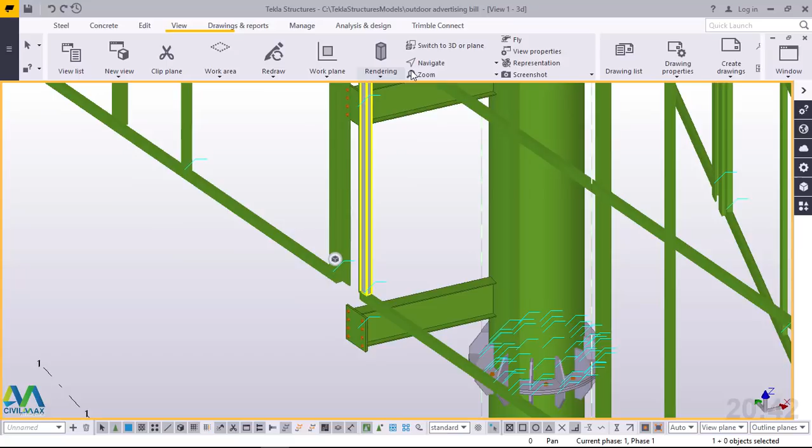Now I'll pick on the bolts. I'll press Control and pick on that. I'll pick on the plate and pick on the beam. Then I'll right click and come to special, come to move special and pick linear.

Now under Z axis, I'll use Z axis. I'll feed 500. I want to move it up by 500 millimeter. I'll click move. Perfect, and give it an OK.

Right click and come to navigate and rotate this. It has been copied up. Then click on empty screen, right click and click redraw to refresh everything. Click on that and click on that and turn this round.

Now this side has been reinforced. Now we want to do the same thing on the other end. Now what we'll do, we just click on the bolts, click on this. We'll click on the bolts, press Control, click on the bolts, click on the plate, click on that.

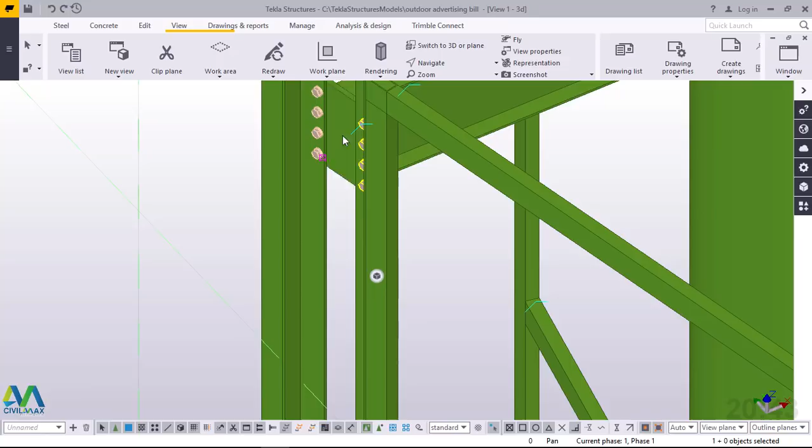Now we want to switch back to a 16-meter plan view because we want to mirror this to this end. Now I'll right click and come to special copy and come to mirror, and I want to use this as my mirror line. I'll snap on that, then come here and click copy.

I'll click OK, right click and come to isometric view, 3D, right click and redraw that. Click on empty screen and click again and come to redraw.

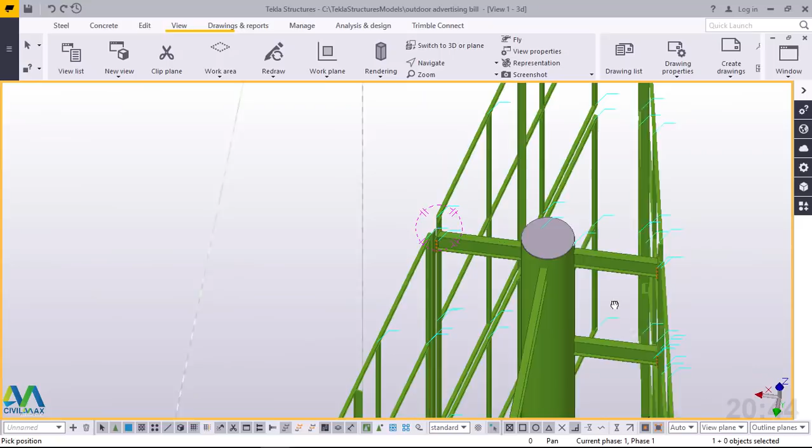If you zoom closer, you'll be able to see this has placed itself accurately, and we want to duplicate it or copy it to the rest of the positions remaining to be reinforced.

I'll click on the bolt and click on this bolt and click on that plate and click on this member. Then I'll right click and come to special copy and come to linear. Under linear, I'll pick on the Z axis. I'll go ahead and click copy and click OK.

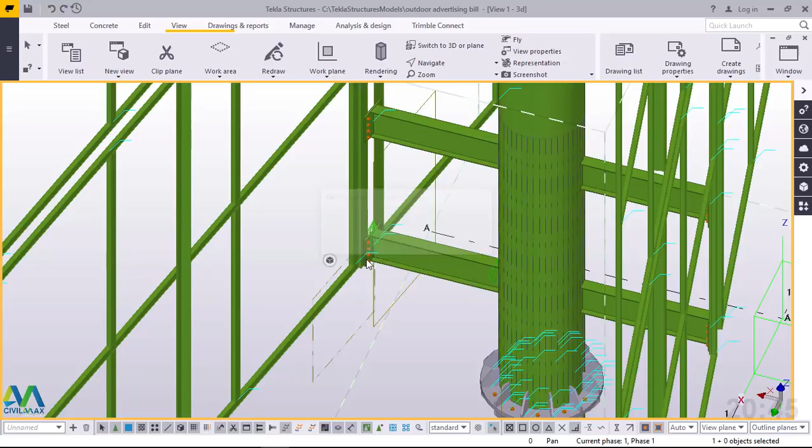Then I'll come here. After clicking redraw, by left clicking on empty screen, then right click and go to redraw. Then I'll pick on the bolt, then press Control, pick on that, pick on plate, pick on that, right click and come to special move, linear, then give it an OK, move it up, right click, left click on empty screen, right click and redraw that. Come to navigate and rotate this.

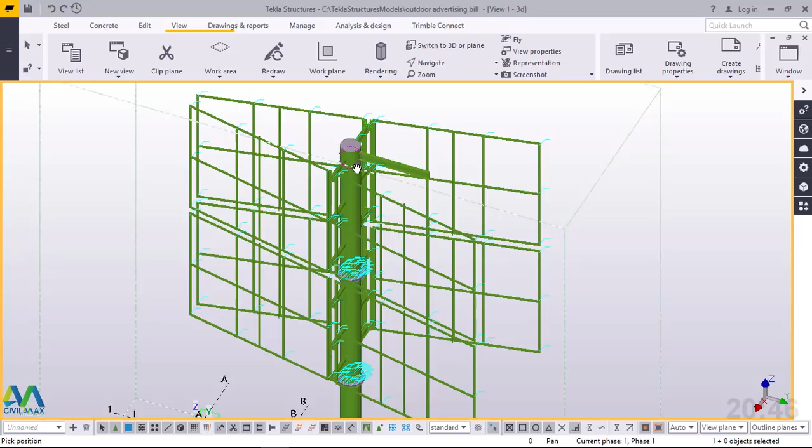We've reinforced this side, and this and this side. Remember, when doing installation, these members will come together, welded together with this primary column, and after connecting these together, this will just be lifted or roped up and bolted to this, instead of carrying the whole 12 by 10 meter up. It will be a hectic job.

And this one will be very, very much easier to install at this height of 16 meters. Now this side has been reinforced. Now we want to reinforce this side to this side, and this side to this beam. Let's work on this beam first. We make sure everything's right and it is in the right place. First of all, let's weld this to this.

It has been welded. Then click on empty screen, right click and come to redraw. That has been done. Then close this, we don't have anything to do with that. Come to navigate, pick rotate with mouse, press your left button on the mouse and hold, and you'll be able to turn this round comfortably like this.

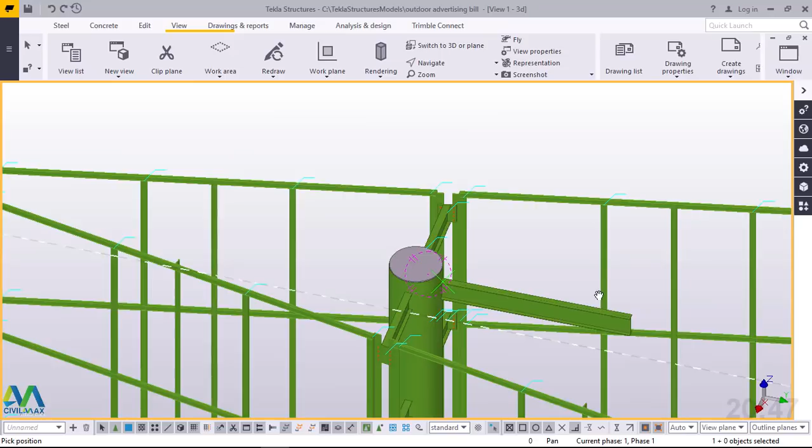Perfect. Now another thing we want to do, we can't just give a 3 meter running its full span to that end to offer a reinforcement, or to offer a place where the bracings will be running from the one panel to the other end.

This length is long. Now we want to cut it up to somewhere here, up to a meter. Then we will create a flange connection to the remaining distance. That will be properly well done and easy to transport once this has been welded to this, because once a meter has been welded to this main column and a flange connection or joining plates has been provided, this length can be joined here comfortably and can be transported without any problem.

Now we want to shorten this, and to shorten that, we'll first of all check the length of this. The length of this is 2700. Now we want to cut off 1.7 meters. We'll click on this member, then come here. We'll click on this member. First of all, we want to make this active.

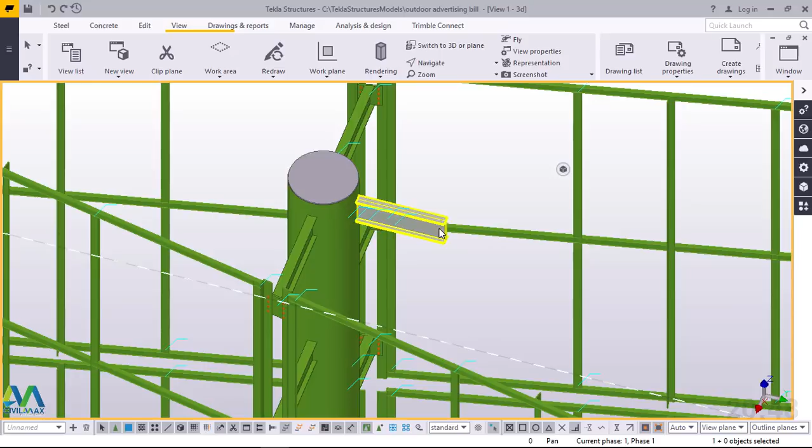Click on that, and we want to change this to 1 meter. On the screen, that is 1 meter. We've shortened that. Right click and redraw. Now that is 1 meter we've done, but we wanted a full 3 meters. The reason why we are shortening it to 1 meter is because this compartment is joined to the bottom one, and remember this will be welded to the main pipe permanently. So doing this is for ease of transportation and ease of installation.

Next, we'll double click on this first just to default on that steel profile member when we are creating a steel beam at this spot. I've done that. I'll click on empty screen to remove that selection. I'll come to steel, then come to steel beam, pick on that. Then I want to snap from this spot here to that spot here.

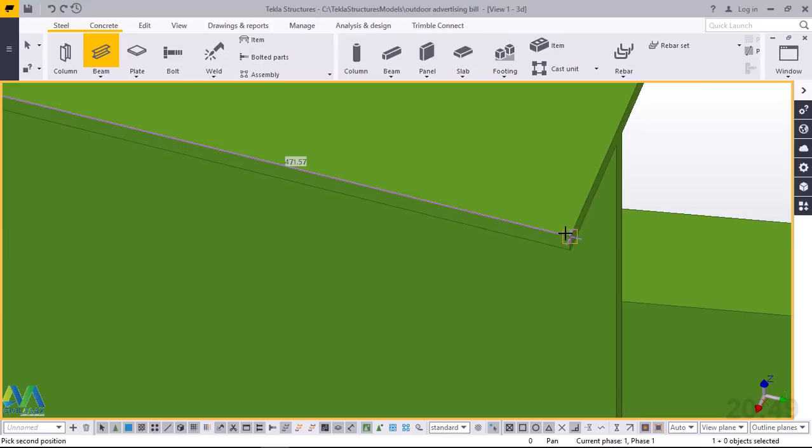Remember, the length of this beam is 1 meter, and we want 2.7. Now we'll go ahead and type 1.7, then enter on the screen. Right click and exit by pressing the interrupt button. Now it has defaulted on a plate, but no problem, this can be changed by double clicking on that.

After double clicking, you will be prompted with the steel beam properties. Under this steel beam properties, we'll go straight to general. Under general, we'll scroll down to profile. Just next to profile, there's a black button. If you hover your cursor on top of that button, you'll be able to see a profile being indicated on top of that button.

Just click on that. You will be prompted with a dialog box of steel catalog, which is this one. Then I'll minimize this. Then I'll go straight to I profiles right here, and select a universal beam, and I'll pick on 305, the first one. Then I'll pick apply, then give it an OK.

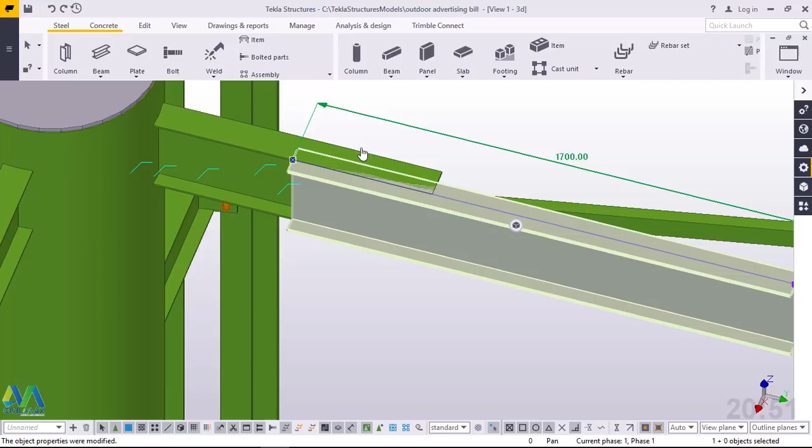Come here and click modify. Then I'll come to rotation here and rotate this, change this to back. Click below, then turn that. It has changed itself properly. Now I'll right click and just move this physically. I'll snap on that position and just come here and join this, and we'll stop right now, and we'll continue in the next presentation.